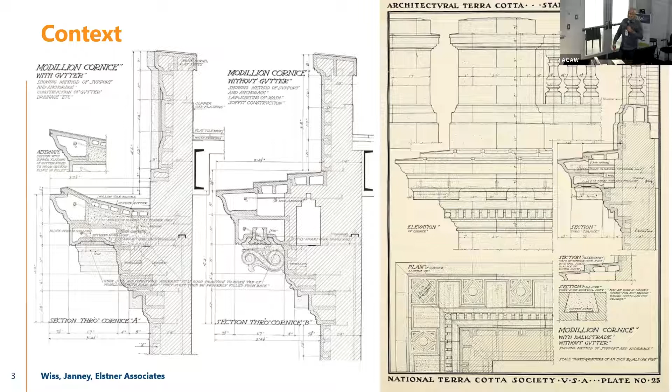As part of our work, we've worked with the International Masonry Institute, which is part of the Bricklayers and Allied Craft Workers, to try to improve the industry. Our team and a number of people from our company are involved. We put a number of details together to help the craft workers understand how these assemblies go back together. This assembly uses more modern extruded pieces in a historic wall assembly, and we put together anchorage drawings. A lot of us are into the technical details of anchorage, and we do training sessions with the Allied Craft Workers to help put these components back on buildings.

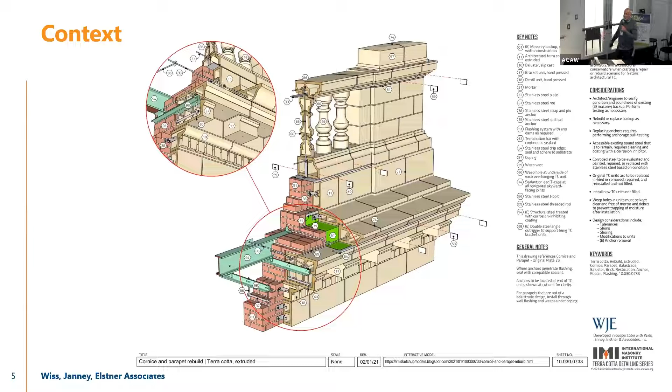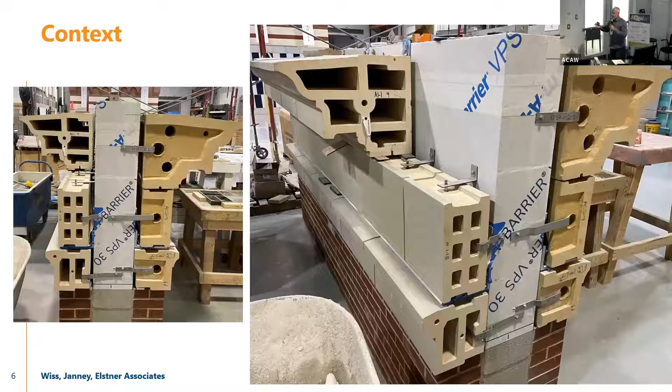It's costly. So when these components go bad or get removed from a building, most owners don't want to pay to put them back. One of the biggest things we wanted to look at was, how do we reduce the weight? How do we improve the ability to put these on in a timely manner to save on labor? And we also want to save on material, so let's try to reduce this down.

That's great, we were able to put that back on, but it was using GFRC, which is not terracotta. We would like to use the historic material. So part of this was also to come up with a system that was sensitive to the historic nature and used the original material.

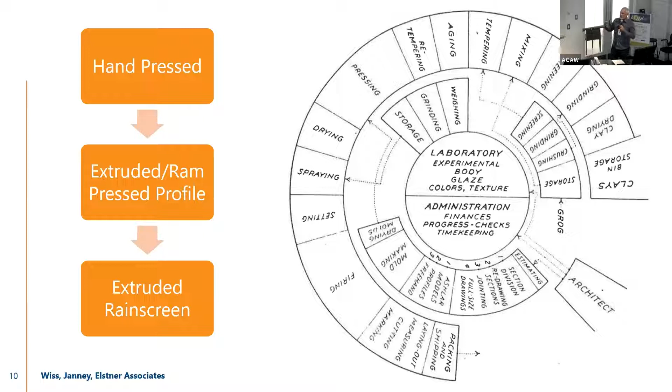And what we deal with, there's the traditional hand-pressed units, which we still deal with a lot, and replacement. We've tried to do as much as we can from a cost standpoint to go to extruded and ram pressed pieces so it becomes more economical. And now our project is really geared around how can we integrate the newer terracotta rainscreen open joint system with those extruded products and have the historic look.

So here's our team. We got together, we had a historic masonry workshop back in July, and we started working on some of the plans for putting this wall and this assembly together. This all started back in December.

Typical components that are bad on a historic building are the corners of the building, the parapet, cornice, and window heads. Those are the three main areas of the building that go bad because they have steel supporting those terracotta elements. So our goal started as we were looking at different options of what we could do as far as brainstorming and doing this project.

So we had a team that looked at the corner and how we could do that. We had a team that looked at soffit and window heads and how do we hang some of these lightweight pieces. And then we had a team looking at the cornice. And what we settled on was an overall team approach. We all got together and we decided to use some of the detailing that we had put together for the International Masonry Institute. And it's twofold.

One, it matches the profiles of what have been put in place from a hand pressed, extruded, and now we can do a newer lightweight system. And it also was to help us potentially train people so that they can put this assembly in and start using it on buildings. So this is the overall profile that we settled on.

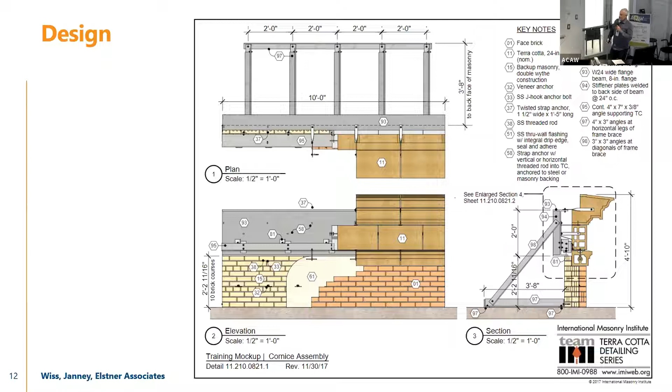And again, the pieces are much thicker and larger than what we ended up with. So we started out by, all right, how do we reduce this down? I know we talked to John and Andrew quite a bit about this as far as what could we do? What are the possibilities? Because the bottom course in there is a new extrusion. The top course is new extrusion.

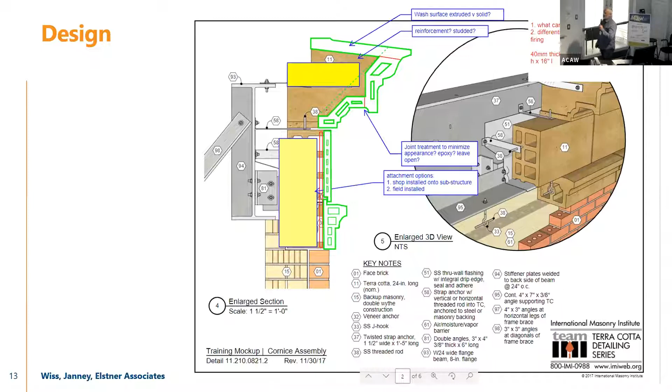The biggest thing was how do we reduce this down and get the weight out of it? And then we wanted to look at using some of the systems that they already had in place because those are cost effective and they're things that are going on every day at Boston Valley.

So here's our overall view of the assembly. We integrated a window opening so we could have a hung soffit unit. We had the profile pieces and we started laying it out with the typical vertical track and clip system. And then we had to come up with a way that we could reduce the weight and put this cornice and hang it on the building.

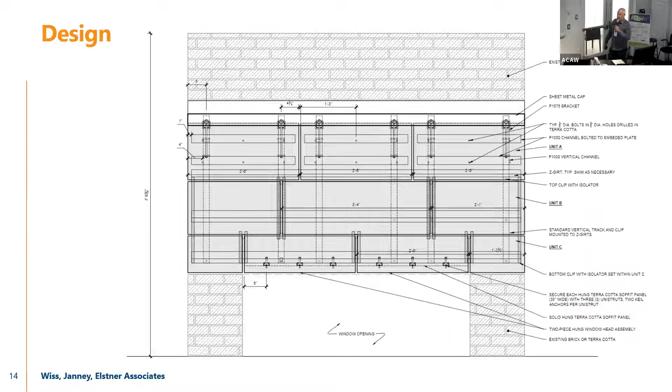So here's some quick sketches of what our concept ended up resulting in. On the left there, we have a hung piece with some undercut anchors that we use on there. We have the traditional track and clip for the first two courses. And then the big challenge was how do we hang this terracotta cornice piece? And so the first part was the design of the piece.

They're all 3/4 inch wide webs and face shells on there. Traditionally, they're 1.5 inches in most extruded units. So we thinned up the material. We also had it so that they could fabricate it on its back and it met within the extrusion parameters that Boston Valley had. So we extruded that piece out. They're 30 inches long. We could probably push it longer than that. I know it starts becoming a weight issue.

But the reality was that piece, we reduced the weight by probably close to 70% over a traditional extruded piece or hand press piece. They're probably pretty close. We reduced the weight by about 70%. The other thing in restoration is we have to have ultimate adjustability. These historic buildings are never plumb level. They've moved around over the years.

So one of the things that I've heard a lot today is talking about tolerances with terracotta. We're used to dealing with that in restoration and on a mortar set, but dealing with it now with an open joint system, we put in hangers, we put in unistrut and horizontal members in there that would allow us to move those pieces laterally and vertically pretty easily. And it's basically tightening some nuts down and then sliding some clips along the unistrut.

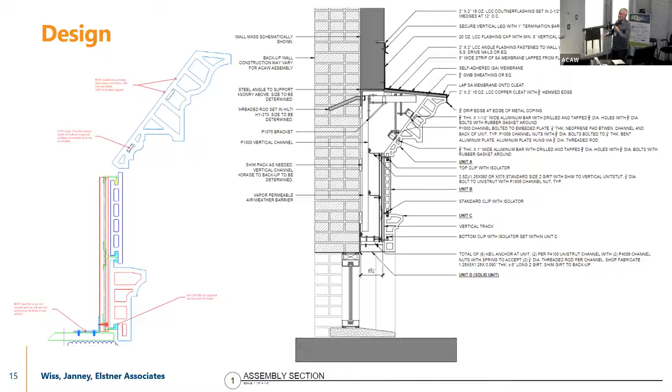Here's a Rhino model that Andrew helped us put together with our team, just to kind of give you an overview. Again, these things all change. We had clips put on the back. Inside there's a bar stock that's located within the shells of that cornice piece that we hang it from to give it some capture if something would ever happen.

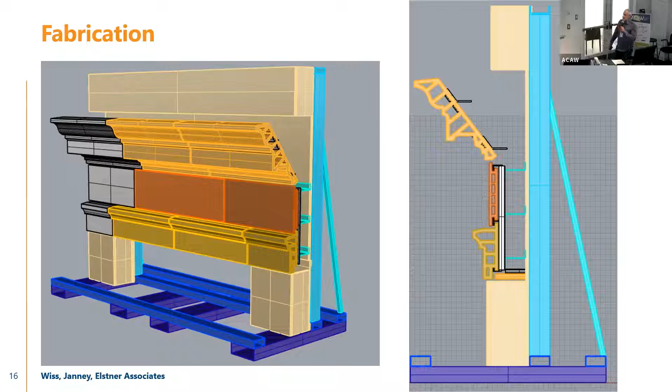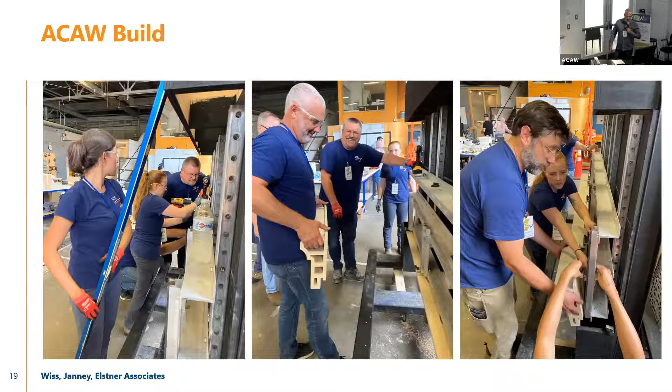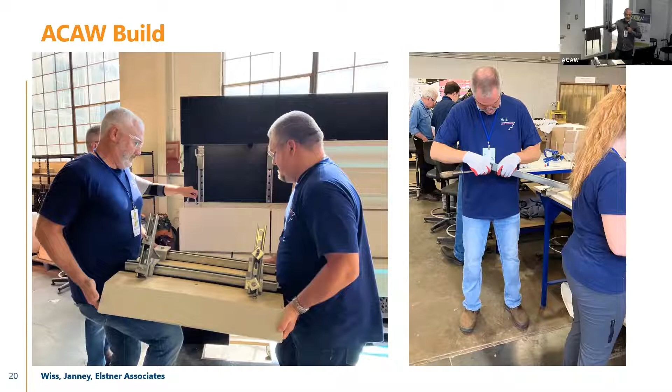And so we kept tweaking it. How do we get the ultimate flexibility out of it, especially when we were here on the build? I'll just go through these quick. There's a couple of the pictures of us putting this thing together. You could see a little bit there in the background. There's the vertical unistrut and some outriggers. The intent is that we could get these things all tweaked and lined up and basically slide these two outriggers right onto the backup and not have to adjust it too much.

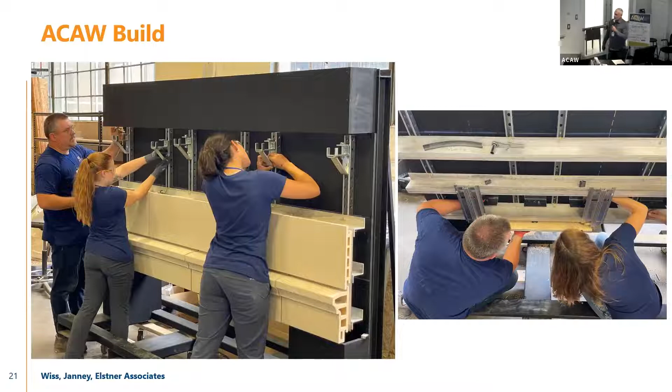There's the outrigger brackets up at the top. The one on the right there is we were hanging some soffit units. If you go look at the mock-up downstairs in the lobby, you could kind of get down on your hands and knees and look underneath, but we hung those pieces in there so that it looked like a window head assembly. A couple photos looking at the overall.

Here's our team. I think we were the first team to bring our own t-shirts to the event, so we got some business for that.

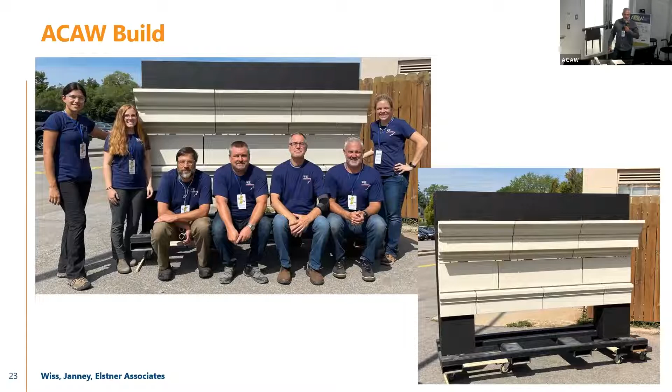As you can see, looking at this from face on, you'd never know that this was anything more than a historic terracotta cornice on a historic building, and honestly, that was the intent. And we had a little lick'em stickum brick for a little fun. We put some lead coated copper or painted plywood up on top to make it look like a flashing on top of it. Take a look at it. There's some ultimate flexibility with this system.

And don't let my father know I put lick'em stickum brick on. My dad's a mason. I grew up doing that.

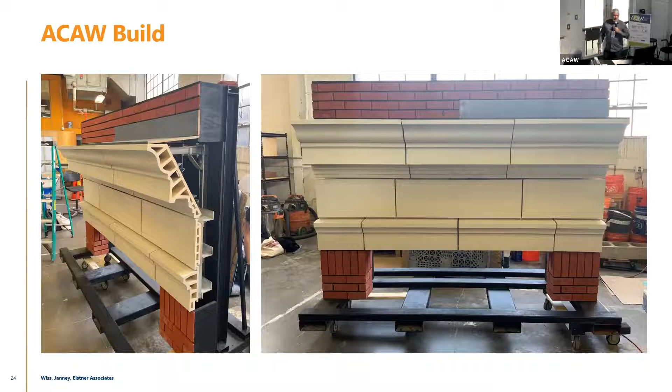So what's next? Our goal is to get this in IMI training centers. You can see here, here's the three versions. We have the hand press, the extruded, and now this rainscreen and more modern system. So our goal is to kind of keep tweaking this. We're also doing an in-house research project at WJE. We have money each year that's allocated to that.

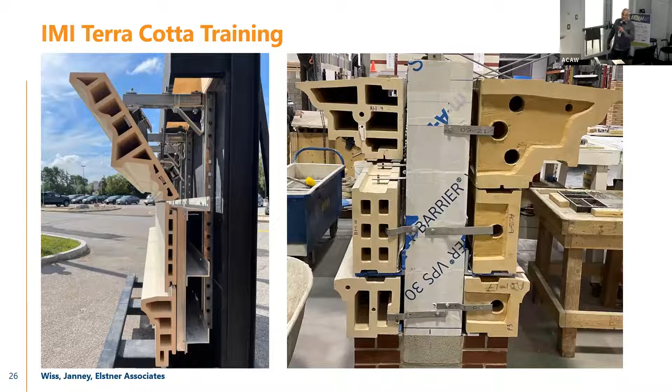We plan to do some impact testing on this because we had some concerns about window washers and swing stages and things coming down. There's also some heavy ball impact testing for capture of these pieces. So we got some testing that we're going to do, and we'll continue to put some papers out on this further. But our ultimate goal is get it in the training center so that the craft workers can get it in the wall.

And as we got going on this project in December, I did an assessment of the Olympia building down in Miami. It's a 10-story historic 1925 terracotta and brick building. And at the 9th floor, which is the main band that you see about midpoint of that picture, is almost an identical profile to what we just did. And it kind of came upon us as we were doing this.

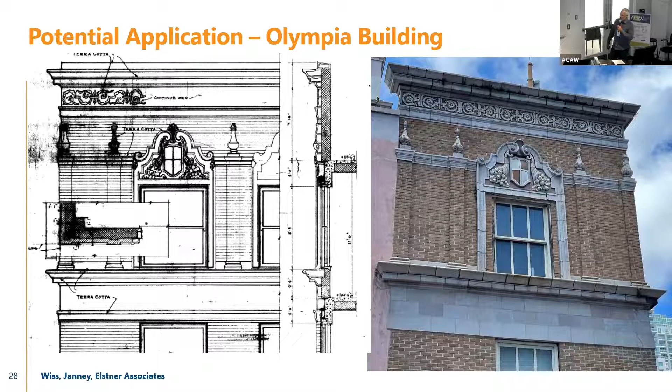So, you can see the cornice ledge there, and there's a few more pieces of flat ashlars, and then the lowest course in here was a profile piece, but has been chopped off, and they put a piece of cement plaster in there. So here's the historic drawing that we found, and here's the profile of that cornice. So it's pretty close to what we have with an extra ashlar piece in the middle.

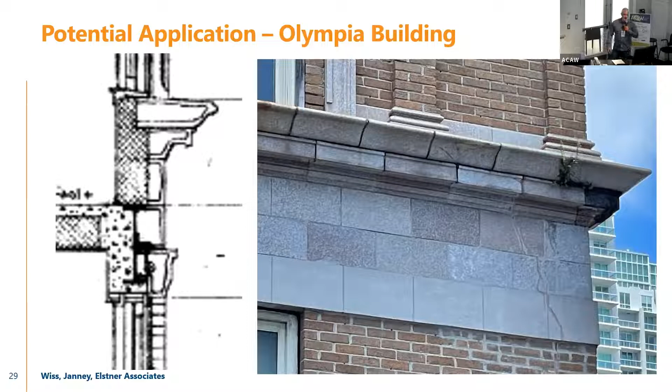So I'm pretty confident we're going to get the design of this in the next couple of weeks, and hopefully we can start integrating it in these projects pretty quickly. Again, here's our profile versus that historic drawing. So I thought it was a pretty good opportunity to use it.